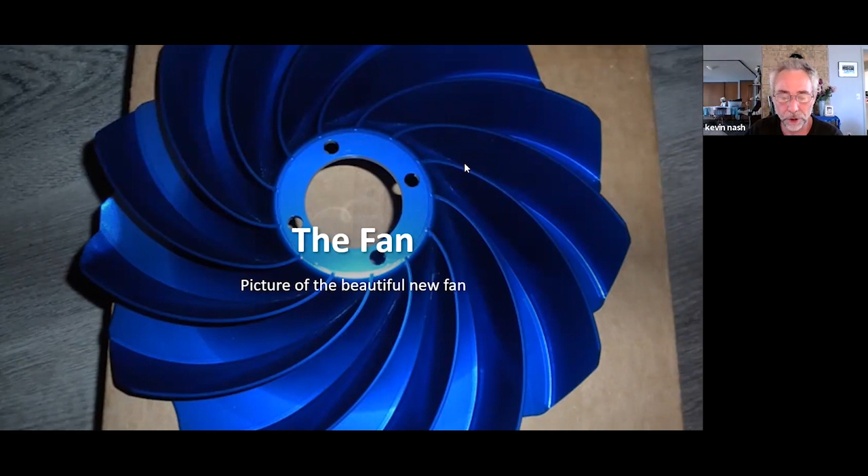Why is something like this a really good idea? It's all about the very poor efficiency of the stock fans. I have to tell you, it was kind of a big surprise to me how inefficient the stock fans were. It's not a fan design problem per se.

Any good forward curved fan, like the 1960, that's actually kind of a variation of it, or a radial fan is supposed to hit 60 to 65% every single time. It does not have anything to do with how much resistance it faces or anything else. And if the stock fans actually did that, I would have never even tried; it would have been so hard to beat that it just would have been almost senseless.

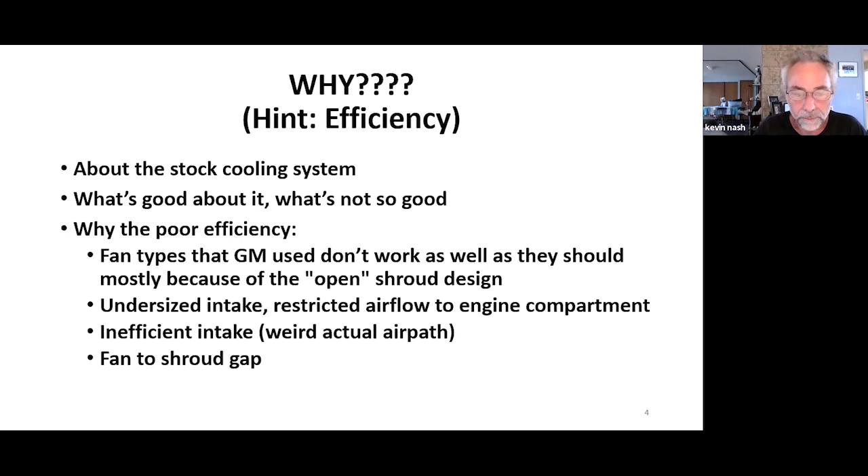The short history of the Nash fan. Right. This fan design thing, we got SolidWorks at work in probably 2001, and I started wanting to try modeling more sophisticated things than I was doing through work, and having a Corvair and knowing about all the fan whining that seemed to come up every once in a while on message boards, the usual electric fan question, the usual radiator fan question, why can't we do this? Why can't we do that? Blah, blah, blah.

I started modeling a fan mostly as practice. As my modeling skills got better, the more it looked like a turbo, because those are the most efficient centrifugal devices on this planet, especially when you have to really make them work against pressure. And even after I got the design done, which was in about 2012, oh my, there was a lot of trying to figure it out before I got it on a car. There's nothing like testing a real fan on a real device at real system pressure to find out what you have.

There, you cannot just take a mag fan, copy the blade shape on one and have it work for you. You'll be so far off. You'll understand immediately why GM probably didn't want to do this. The reason is because it makes the fan too big. If this would have been a standard backward curve fan, it probably would have had a diameter of over 12 inches, and the blades would have been probably 2 inches high. It's got to be a monster to compete with the mag fan.

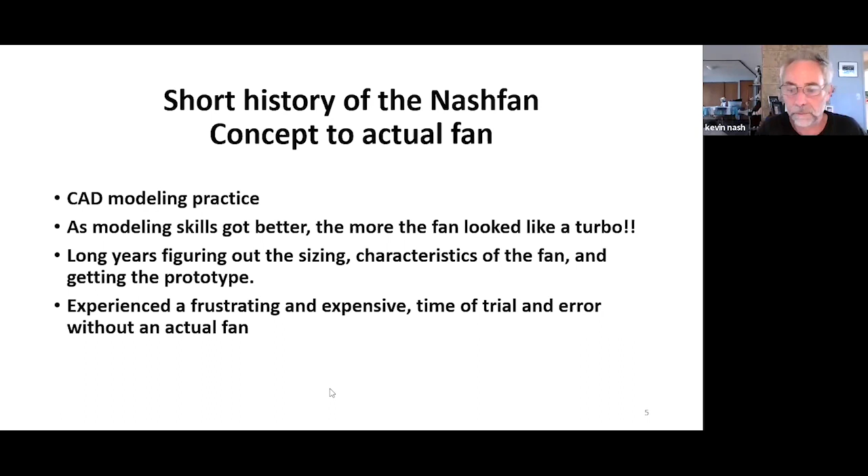Once I received my prototype, and because my engine was apart for doing some work, I was eager to find out how the fan compared to the mag fan. This was the easiest way I could get some numbers and a relative sense of how it worked. This is the top shroud with a fan bearing on it, duct taped to the floor in my shop. The pulley's mounted. It's got a piece of black tape along the rim to provide color contrast for a reflector, so I could measure the RPM using a laser tach.

Oh yeah, there's a hole in the top part of the shroud. This is a bolt hole for something. I can't remember what it is, but that's where the pressure probe goes in. So I was able to measure pressure and RPM for the fan. This is a great way to detect changes if you're going to do something to the system, like put a bell on there, or change the intake diameter of the shroud. Here I'm experimenting with venting of the pulley to see if I could get more airflow out of it. And it's real easy to see these tiny changes with this little bench tester.

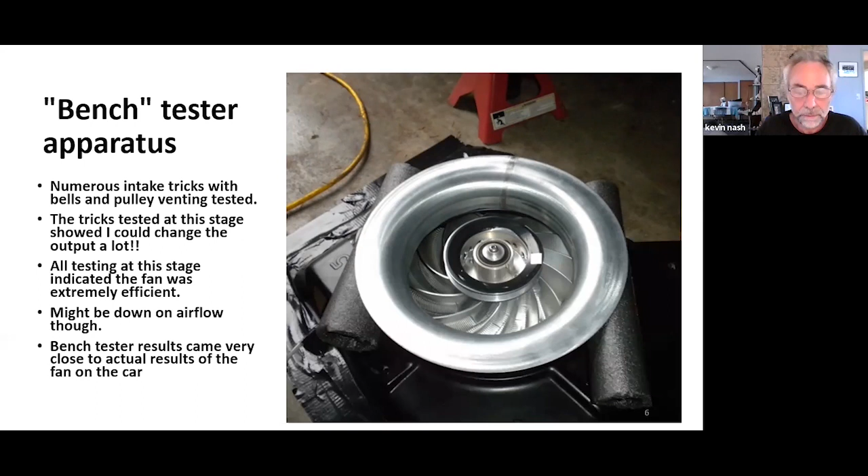This is how we did pressure versus RPM for the Nash fan with the airflow pulley and a bell mouth.

That pressure curve is the green curve, and this is done with the engine hot. I have to point this out because the original pressure numbers for the mag fan, as for all their fans, by the way, are done cold. This is no head heating, doors blocked open. That's how they get their pressure.

When the heads get hot, the pressure falls, and this too is seen on the engine when it gets up to the head temperature it's supposed to run at. They had different ones depending on what they're doing. The exhaust from the heads might be as high as 180 in one test and down as low as 150 in another. But this lower curve, the red one, is what the pressures tend to do when the heads are hot. For example, at 4,000 RPM, you're supposed to see around 7 inches. When the engine is cold, you're supposed to see about 8.3 to 8.4.

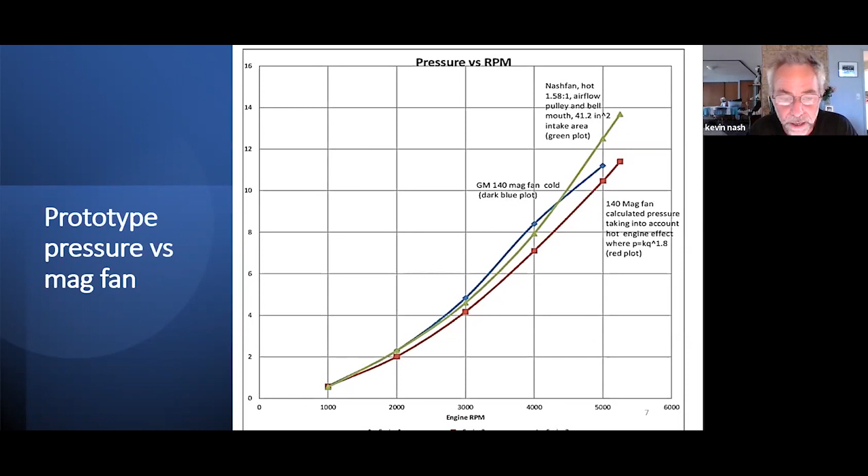Next slide. This is the efficiency comparison for the prototype. This is 61 through 63. Peak efficiency for this prototype was 56%, which is perfectly normal for a backward curve fan. The two stock fans on here are already below 30%. And what's weird is that the efficiency is falling with speed, and it should be climbing just like it is with this other one. They're already working too hard. So you can see there's a big difference in efficiency.

I was happy to see this. This is what you're supposed to be able to get on average. I was a little disappointed because you're supposed to be able to get upwards of 75%. And the theory was that I wasn't pushing the fan hard enough. It basically needs more static pressure, or maybe more flow, to see its best efficiency. I was thinking if I resized the fan a little bit, that might be all that was needed to really get it into big league efficiency. Next slide.

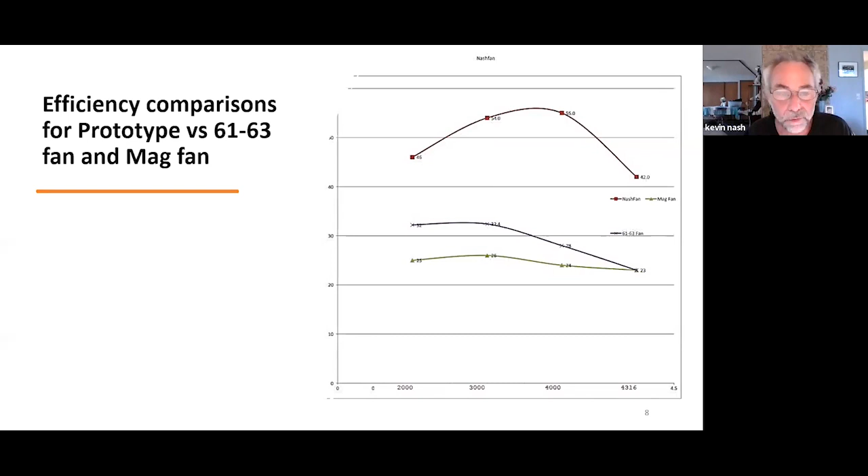And yes, this is inches of water column. Somebody asked that real quick. It's kind of the standard pressure unit for air systems. So these next graphs are about the as-tested, hotted up, all-the-tricks-thrown-at intake system. This is a bell mouth that's quite a bit bigger than the stock intake, about 8.5 inches ID versus the stock intake, which is 8.125, and it has guide vanes on there.

Lordy, I wish somebody would have told me there might be potential for air spin in the intake. It's there. It reduces the output of the fan a lot. The air is trying to chase these fan cells as they go around, and it can't quite catch up until it goes in. And I seem to have gained about as much airflow with this as fan systems that are about 30,000 times bigger than mine when they've had air spin problems. So it's really neat to see that this basic idea works on everything. So, next picture.

Yeah, this I'm really proud of. This is showing some big league pressures. So at 4,000 RPM, this is 11.5 inches. The 61 through 63 fan will get to 10 inches here. The mag fan only gets to 8.4 inches. Look at this curve. There is no point on this curve that ever crosses any of the other ones.

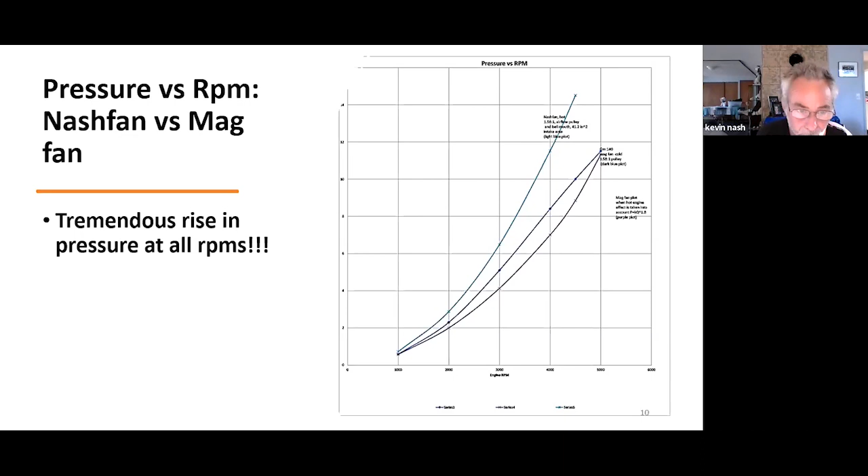The highest pressure that I've read with the fan is 15.5 inches. You know, this is crazy. You have to work so hard to get even close to that with the mag fan. I've heard of it being done, but they're just spinning the heck out of the fan. They have to neck down the inlet so that it keeps the fan from using a lot of horsepower to do it. So they're not even in the same ballpark. Next slide.

The efficiency for this thing is also crazy, out of this world. It's 86% peak efficiency. It's almost right on 4,000, and that's just a sweet spot to be having your peak efficiency at for most cars. And again, the efficiency for both fans is well under 30% there. To put this into comparison with other fans, all of the Porsche fans on the vertical drives for any of the stock cars is 71%. They will not get past that. That's the best they can do.

They stall out and go down to 65% at the end of their effective range, and that's where they max out their flow. The big thing about the flow on those is that the peak fan speed was always limited by how close to the speed of sound they were, and that's why the fan speed always ended up being about the same. It started to get geared down towards the middle upper end of the RPM range, and the cooling demands were down lower because of the enhanced torque and increased engine displacement.

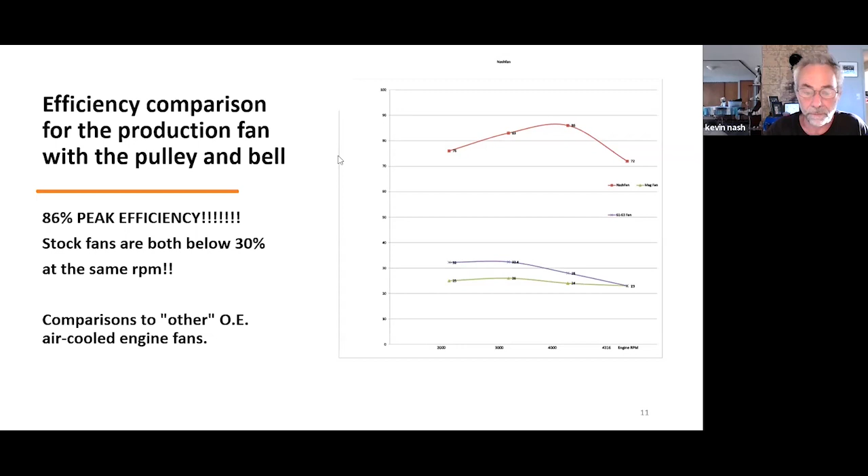Okay, this is what it's all about, this is pretty wild. The stock fan at 5,000 RPM uses 15 horsepower. The Nash fan horsepower usage at that same RPM is 7. When you take the lower shrouds off, now the horsepower is 4.49. If I had included that same thing on the mag fan, it probably would have been a good 20 to 30% higher. Never did it.

That's one of the buggers about popping the shrouds off: even if you need the cooling, it's going to use more power. And whether you feel it or not has everything to do with how tight you put the fan belt.

The 7 horsepower at 5,000 RPM correlates with about 11 horsepower at 6,000 RPM. And that's the kind of horsepower usage that you can expect from the Nash fan when you take the pulley ratio down to 1.25. That's a huge reduction in fan speed. It's removing a lot of cooling, also because of the fan speed. Neat to see this lowering of horsepower usage from flow.

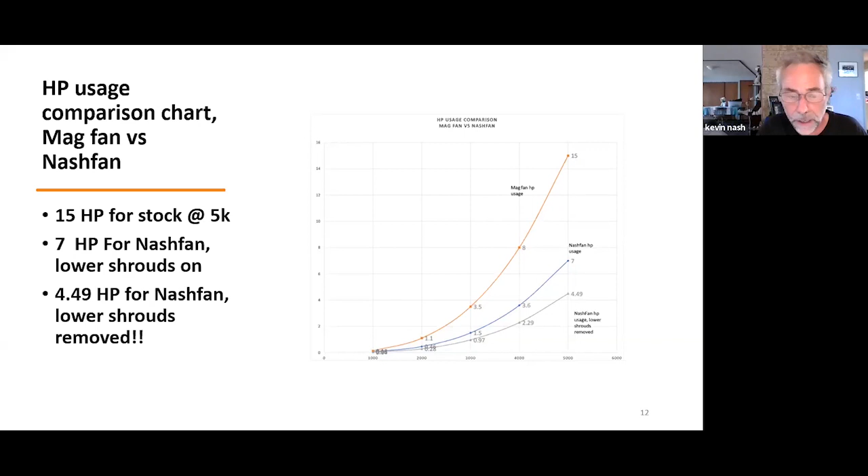Next slide. Okay. I want to talk about tuning for different applications. Most of the lower horsepower cars, I would say, this is a ridiculous amount of output. They don't need it. We're using a stock pulley ratio right now because that's the easiest to do. It's easy, simple. The goal all along for me was to make a fan that was big enough that you could make a dent in heat for horsepower on turbos and other heat challenged applications.

But for a 110, 80 horse, 95 horse, you really don't need that much. In fact, the fan is so big when set up this way, you won't get stock pressures unless you run the pulley ratio down; at like 1.42 to 1 it's the same pressure at idle as you would get with the mag fan. And in fact, if you were going to go 1.25 to 1, say for really high RPM things, and you have the lower shrouds off, you're still more flow than you would get with the stock fan. It's about 430 CFM at 1,000 RPM.

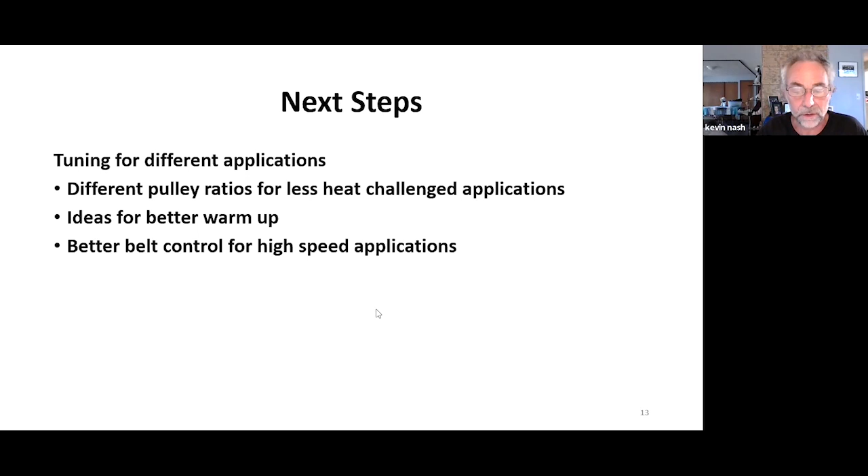All right. How do I get one? The only way you can get one of these is to participate in a group purchase. We're organizing the next run. Our goal is to start, you know, being able to get going on this next spring, and have these ready for delivery late in the spring.

But you can't wait for the fans to get made and then buy one. You have to put your money in and go along for the ride just like everybody else did. The process is this: you tell me that you're interested in being a part of this group purchase. I send you out this order form explaining the prices and the process and everything that goes along with that. You fill that form out, you send it back to me, and then the next email you get will be that we have the minimum number necessary so that we're going to start people to send money in.

And then the long wait begins. Be patient. It's an awesome fan. Takes a long time to get. We've never had one of these runs go off hitch free. They always seem to take longer than we think, but everybody is just thrilled to death when they get them and have been really happy with them. And by the way, we've already got repeat customers. We have customers from the first run that are already wanting to get more of them on this next one. And it's just really neat to see the excitement about it.

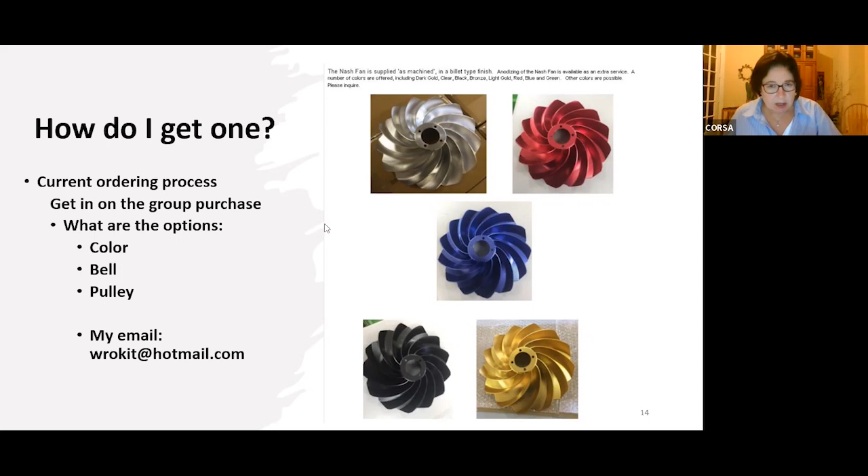Okay, so there's a question here: with additive manufacturing materials becoming stronger and more economical, is a 3D printed version in the works? Probably not, at least for now. It's been really clear to me that for stiffness reasons, the fan really needs to be a metal fan. That's the good reason that the mag fan was made out of mag instead of plastic. If you make it from plastic, you have to add so much material to make it stiff enough. Even if it can handle the heat, they end up being heavy.

Everybody probably knows about the Delrin plastic fan, and they got that out of production really quick once they found out that it was making formaldehyde. What a lot of people don't know is that they went ahead and redid it out of nylon. I saw one of those fans, and although people say it was exactly the same shape as the mag fan, that's so far from the truth. They had to beef that thing up like you wouldn't believe, and there was so much extra plastic on it.